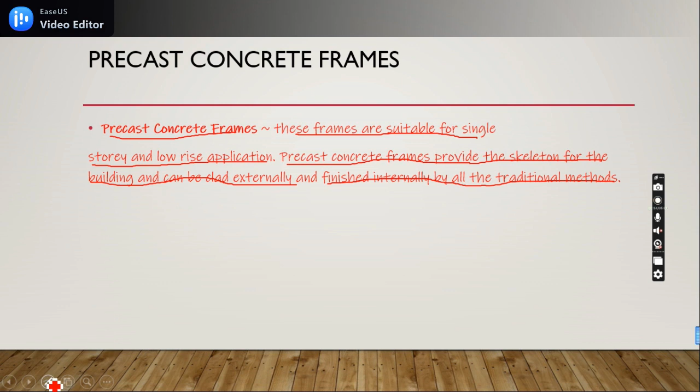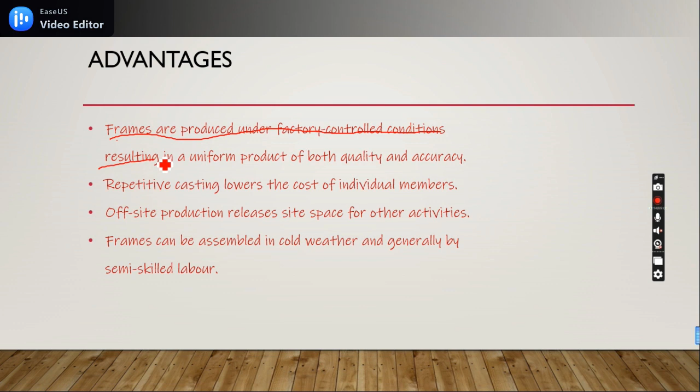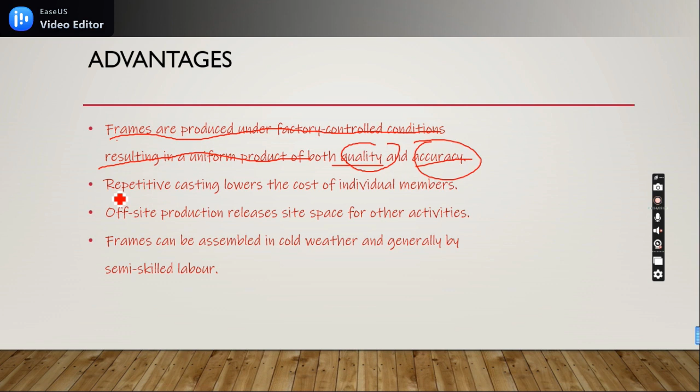Now let's look at advantages of using precast concrete frames. Frames are produced under factory-controlled conditions, resulting in a uniform product of both quality and accuracy. Repetitive casting lowers the cost of individual members.

Off-site production frees site space for other activities. Frames can be assembled in cold weather and generally by semi-skilled labor, so it does not require complex skills to cast them together.

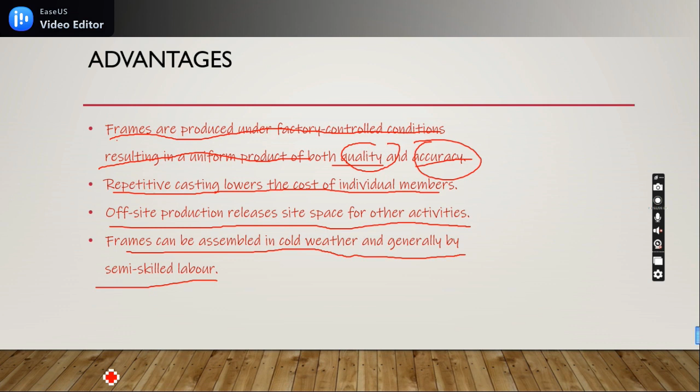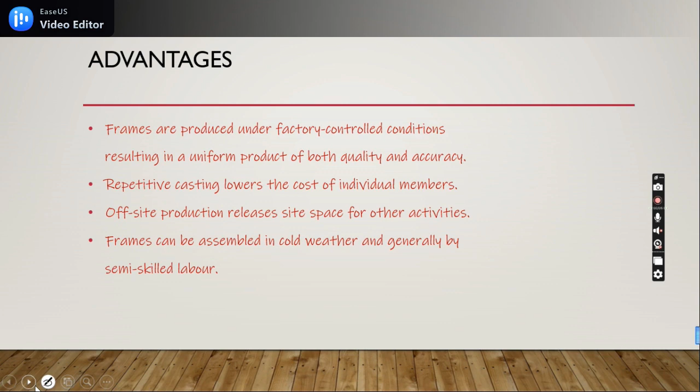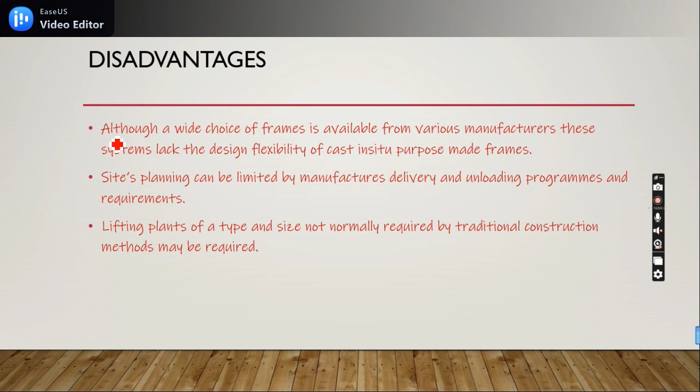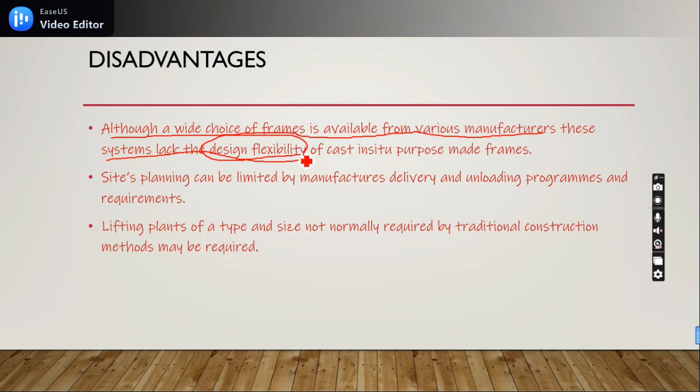Let's now look at disadvantages of using precast concrete frames. Although a wide range of choice of frames is available from various manufacturers, these systems lack the design flexibility of cast in situ purpose-made frames.

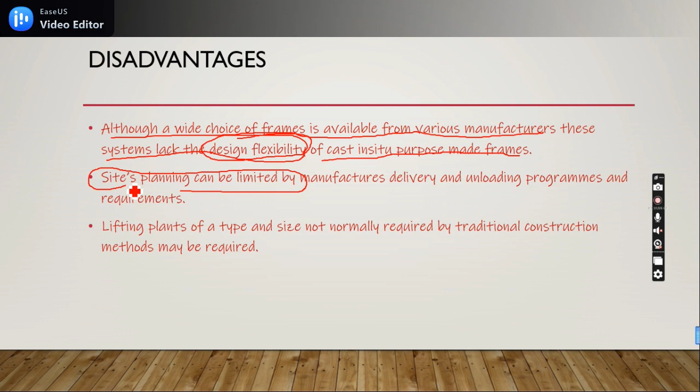Site planning can be limited by manufacturers' delivery and unloading programs and requirements, which can cause delays in other site activities. Lifting plants of a type and size not normally required by traditional construction may also be required.

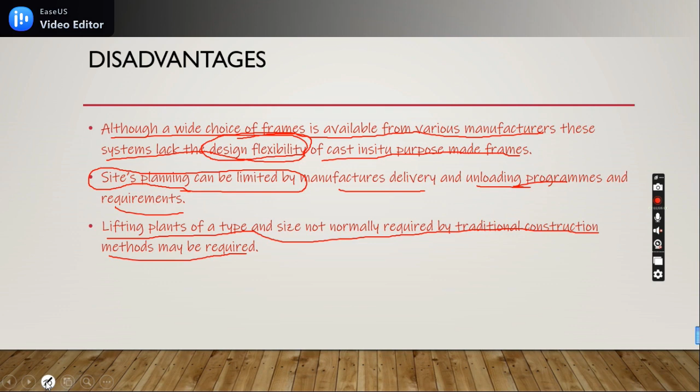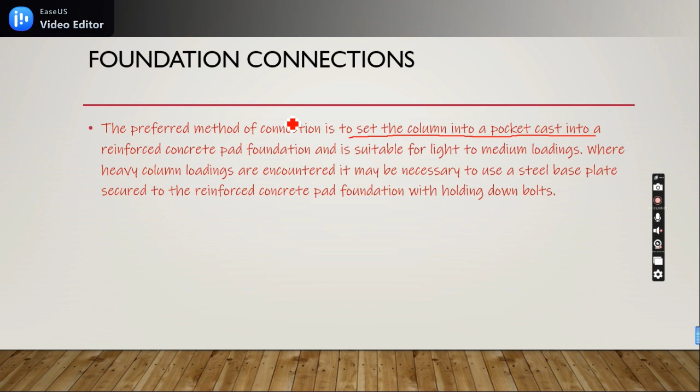Let's now look at foundation connections. The preferred method of connection is to set the column into a pocket cast into a reinforced concrete pad foundation, suitable for light to medium loadings.

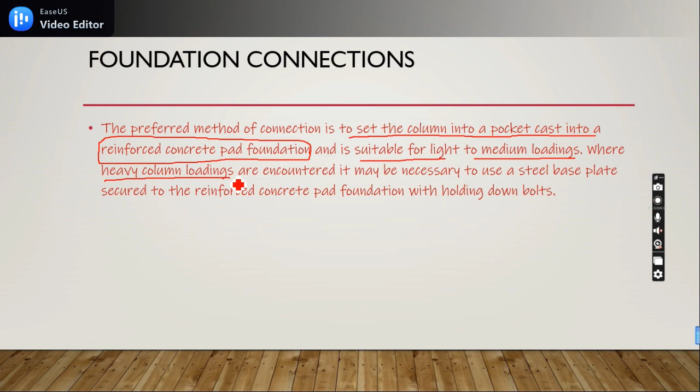Where heavy loadings are encountered, it may be necessary to use a steel base plate. So a steel base plate is required when heavy column loadings are encountered. The base plate should be secured to the reinforced concrete pad foundation using holding down bolts.

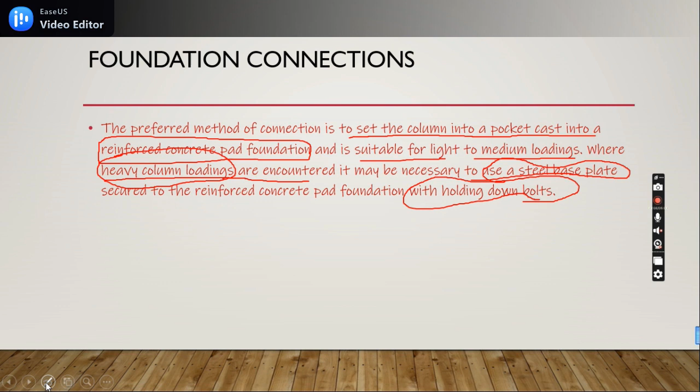Let's now look at the typical details of column to base connections. Here is the precast concrete column grouted into a pocket in the foundation. Here are the temporary steel wedges used to put the column into place and support it. These are the typical details for column to base connections.

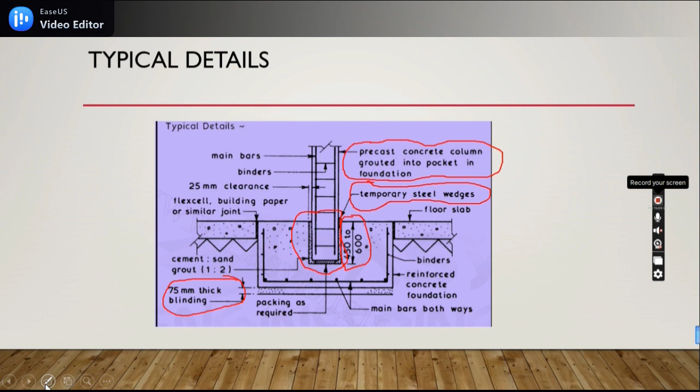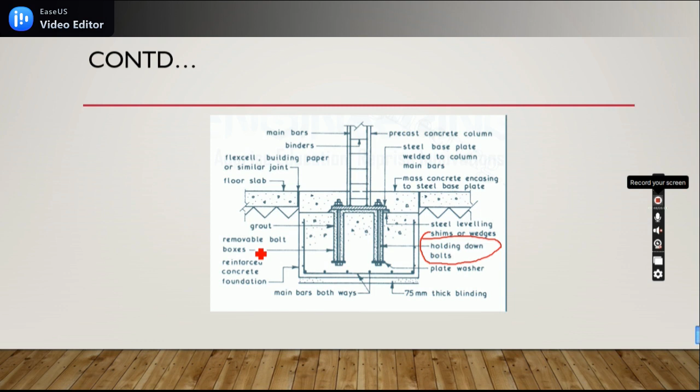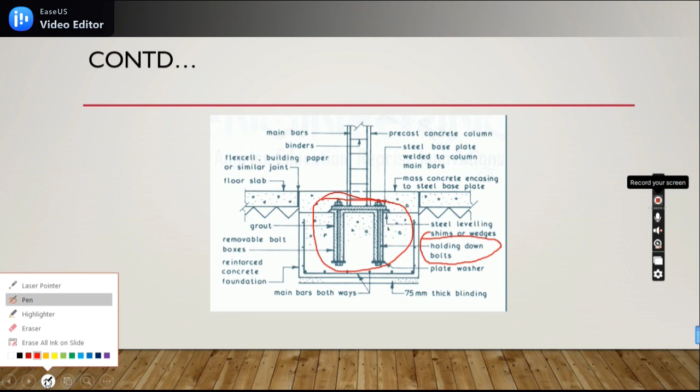Let's move to the next item. This is another typical detail for column to base connection, with holding down bolts. This method is used where the column is encountering heavy loads. The details are just like the previous image, but the difference is the holding down bolts for the column. Those are the typical details for column to base connections.

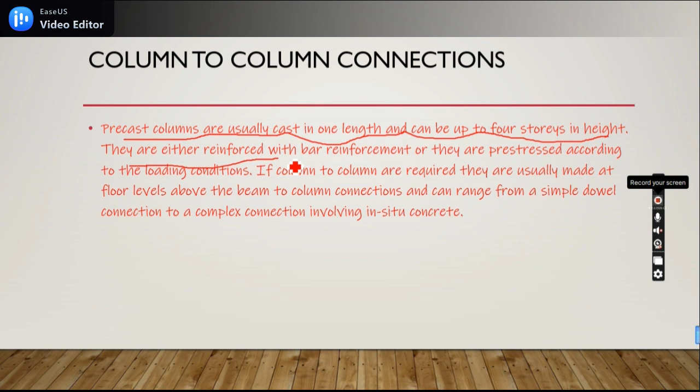Let's move to column to column connections. Precast columns are usually cast in one length and can be up to 4 stories in height. They are either reinforced with bar reinforcement or pre-stressed according to the loading conditions. If column to column connections are required, they are usually made at a level above the beam to column connection, and can range from a simple dowel connection to a complex connection involving in situ concrete.

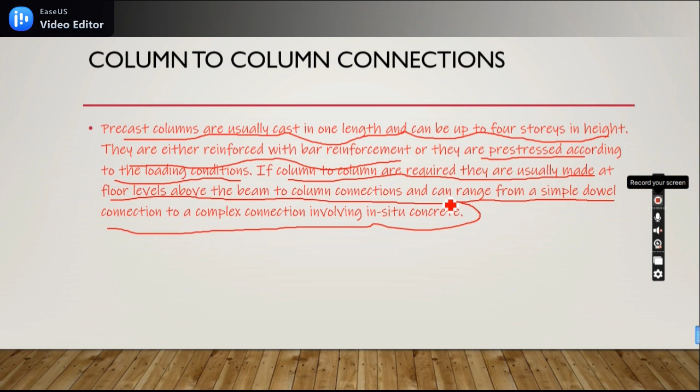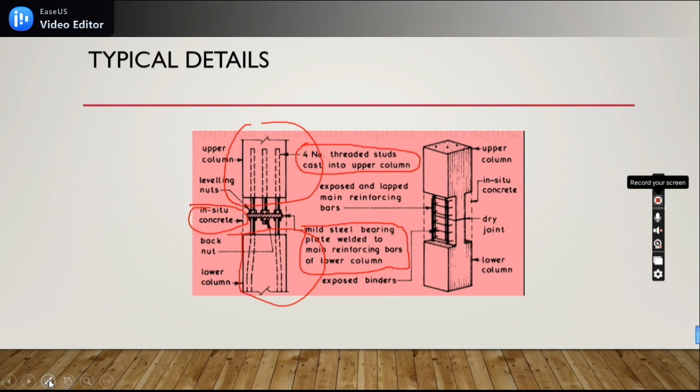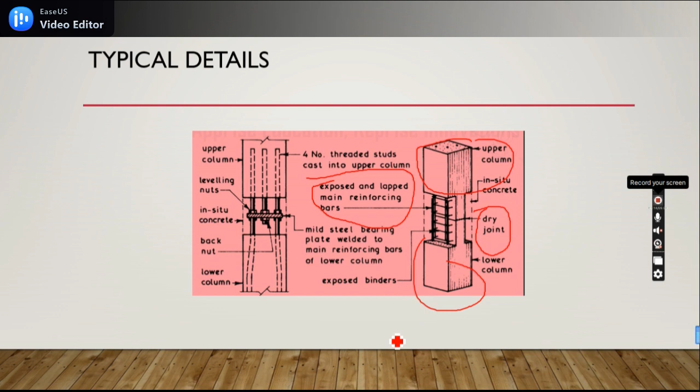Now let's look at this second image. You have the upper column and the lower column, and you can see where the connection has been made. This is the dry joint, with exposed and lapping main reinforcing bars. You can see the reinforcing bars for the columns there. These are the typical details for in situ concrete column to column connections.

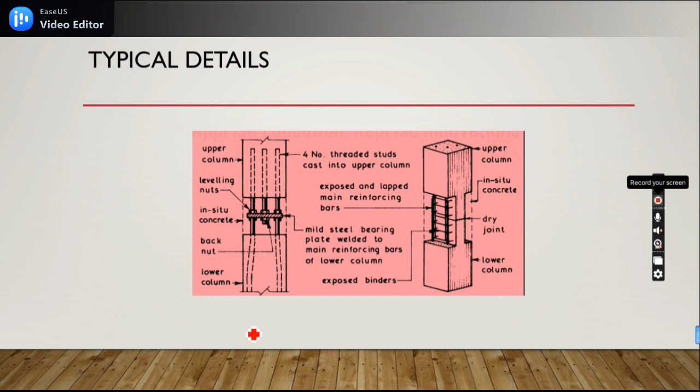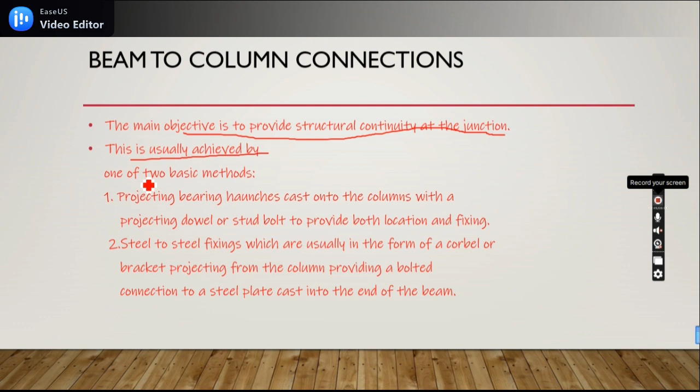Now let's look at beam to column connections. The main objective is to provide structural continuity at the joint or junction. This is usually achieved by two methods: one is projecting bearing haunches cast onto the columns with a projecting dowel or stud bolt to provide both location and fixing; the other is steel to steel fixing, usually in the form of a corbel or bracket projecting from the column, providing a bolted connection to a steel plate cast into the end of the beam.